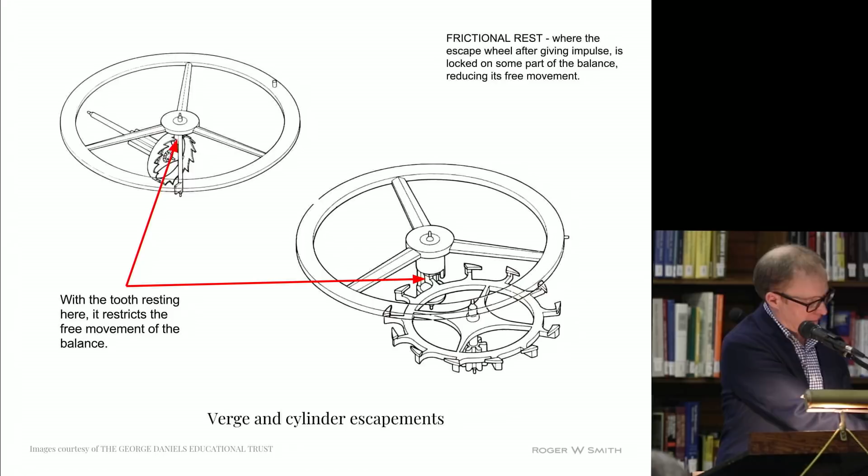Is that working? Yep, okay. Now I'll just warn you, my drawing skills are very basic. I have a 5.5-year-old daughter who is now a better drawer than I am. So if you can just bear with me.

But basically, a cylinder escapement, we have a circle. This is basically the cylinder of the staff. This is a center line, or a center point where the balance pivot will be, and this is the center of our escape wheel. And coming out, we will have a tooth which basically rests upon the wall, the outside wall of the cylinder.

So this balance wheel is turning clockwise and anti-clockwise for every vibration. And as the balance wheel turns clockwise, eventually this tooth will drop through the gap here and it'll end up inside the cylinder. So what we have is a tooth lying inside the cylinder.

And it is this issue, or this is really what frictional rest is about, because at all times the escape wheel is trying to turn in a clockwise direction, and therefore it's applying pressure onto the cylinder or the staff at these points. And it is this applied pressure here at all times which restricts the free movement of the balance. This is a real issue with the frictional rest.

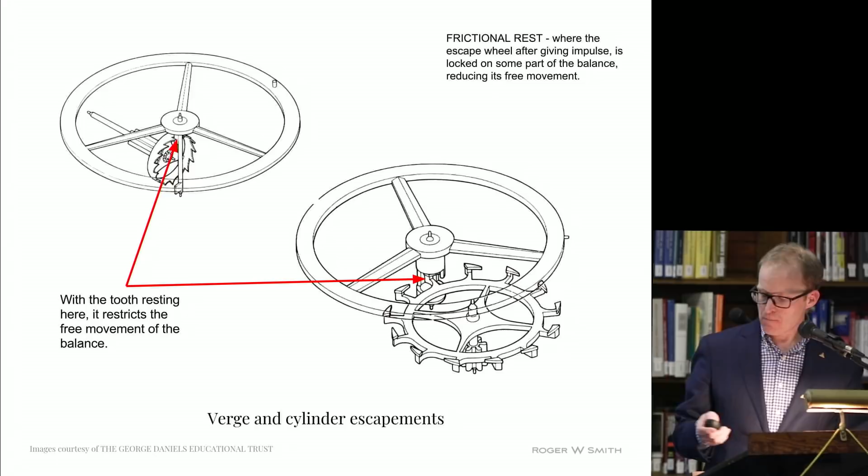So detached - what is detached? Well, a definition of a detached escapement is when the escape wheel is locked free of the balance axis by an additional component which is in contact with the balance only during the escaping angle, and sometimes for less than the whole of this angle. It goes on to say that the balance is free to vibrate in its natural period during the supplementary arc.

So I'll just do another quick sketch. A good example of a detached escapement is a detent escapement, which is this one here - highly detached, highly accurate. If we have the center of the balance wheel here, you can see over there the impulse jewel, and then coming down here we have the detent with its screw there. On the detent we have a locking jewel here, and then here we have an escape wheel center with teeth here. Now, when the escape wheel is locked, we have a tooth resting here on this locking jewel. What this means is that when this escape wheel, which is trying to turn in this direction, is locked here, when it's delivered its impulse through this jewel, this balance is now free to make its rotation. The reason is because we have clearance here and here, because of this locking. So this is a good example of a detached escapement.

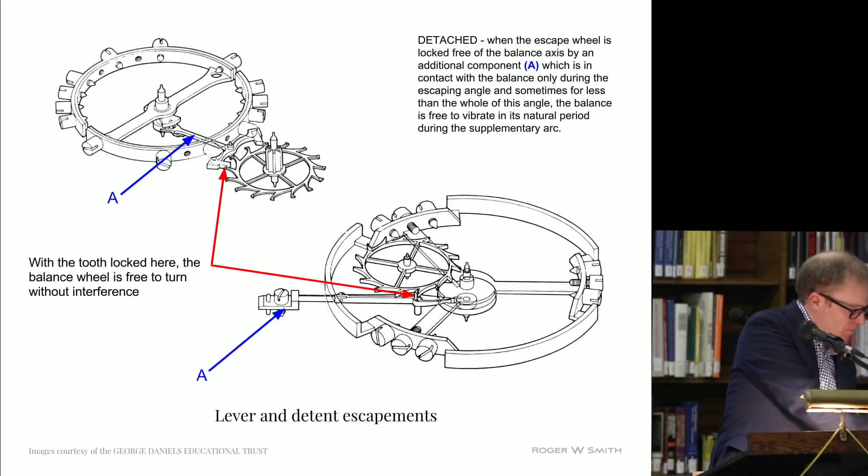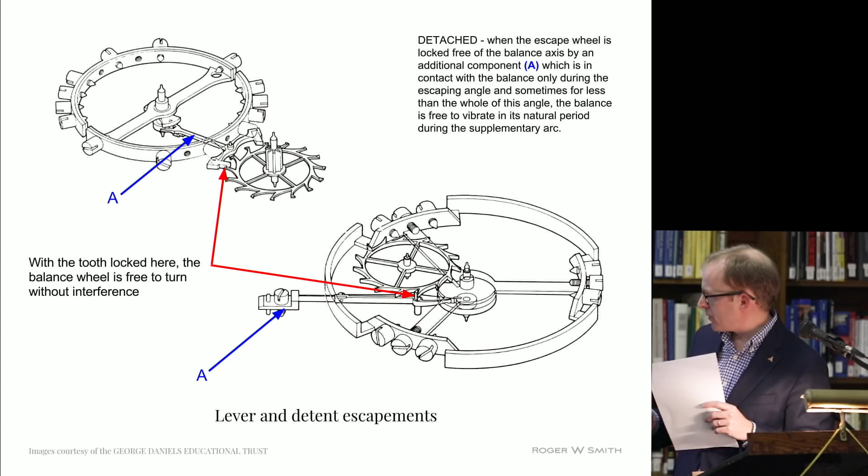So I better just clear up the areas to do with angles and so on. So with a standard arc of swing of a balance, let's say we choose a balance which is rotating with a total vibration of 270 degrees.

Basically, during the impulsing of a balance, when energy is delivered through to the balance, we have what's called an escaping angle, and that escaping angle is, in this instance, 40 degrees. We have an unlocking angle, where the escapement is unlocked to deliver the power, and that's 6 degrees. And then we have what's called a supplementary arc, so we have 112 degrees of swing after each vibration. It's this free vibration, this free swing or supplementary arc, which is key in the accuracy of a precision timekeeper. So the total arc of all this, from here round to here, is 270 degrees.

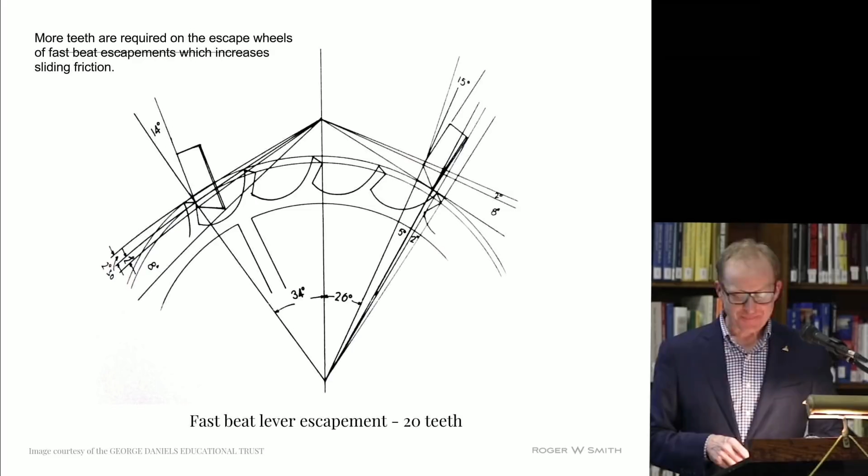So yes, that's a fast beat escape wheel, 20 teeth usually on there, but I'll tell you a little bit more about that later on as well.

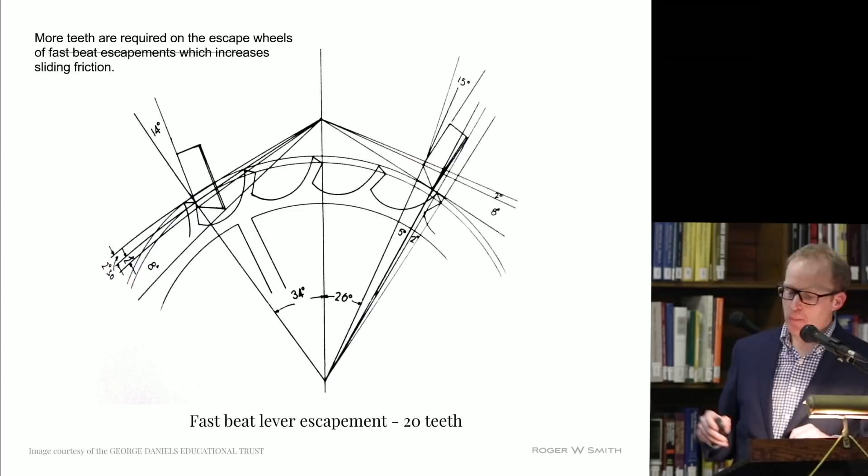So impulse. Now this was not covered in George's 1990 presentation, and over the years I've become increasingly aware of the importance of delivery of impulse. When I'm discussing impulse, what I'm really talking about is the clarity or the quality of impulse. This I'm going to cover in a couple of sections: the first is delivery of smooth power to the escapement, while a second section is delivery of smooth power through the escapement to the oscillator or balance.

If the impulse is delivered vaguely or sporadically, then you will not achieve a good rate of timekeeping. Any impulse which is hindered by an applied lubricant or transmission of power will be open to vagaries in its ability to deliver good, clean and consistent impulse. So let's first discuss the poor transmission of power to the escapement.

So Breguet's natural escapement is a very good example of a poor transmitter of power through to the escapement. Why? Well, it's because of these two gears here, which are linked together at a close ratio of obviously 1 to 1, and due to their large diameters, which at their rolling point of contact can act as large disc brakes on the power delivery. Because of that large diameter of these two closely mating gears, you can only ever achieve a theoretical rolling action between both sets of teeth.

Why is this? Well, it is because for the wheels to rotate, they need freedom within their pivot holes. And it is this freedom which will allow the wheels to move past their theoretical rolling point, which will create interference and, in turn, fluctuating power delivery.

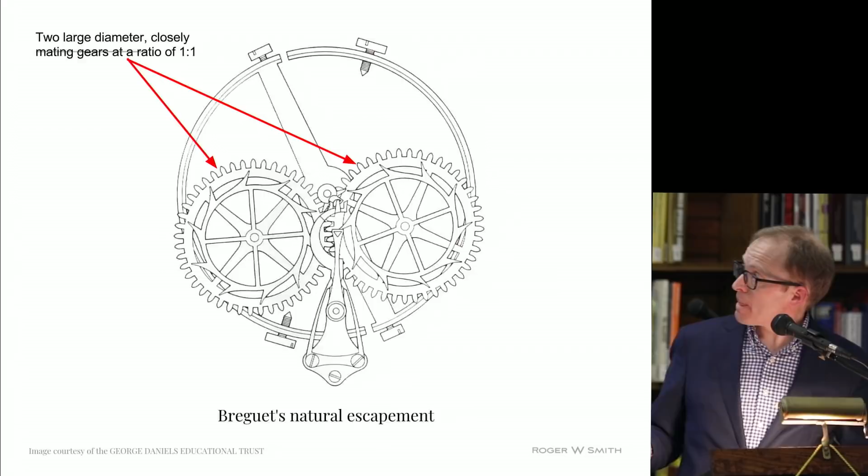Another issue to consider when using large diameter and close ratio gears is tooth surface contamination. Here is an example of where I've seen this occur on the slimline coaxial escapement, where these two sets of teeth mesh together.

I began working on this escapement in 1998, and it became apparent fairly early on that these closely ratioed gears could cause issues, particularly if the surfaces were not scrupulously clean, but also if the surfaces were too clean.

I also experienced tooth surface breakdown, which I put down to the fact that the true rolling action could never be achieved. What I witnessed was a deposit build-up where the two gear ratios vied for settlement and created interference, resulting in a deposit build-up which caused the gears to stagger, or on some occasions to lock.

So how do we reduce the risk of this interference? Well, in gearing, which requires freedoms for smooth running, we can never completely remove this error, but as a watchmaker, it is my duty to minimise the error.

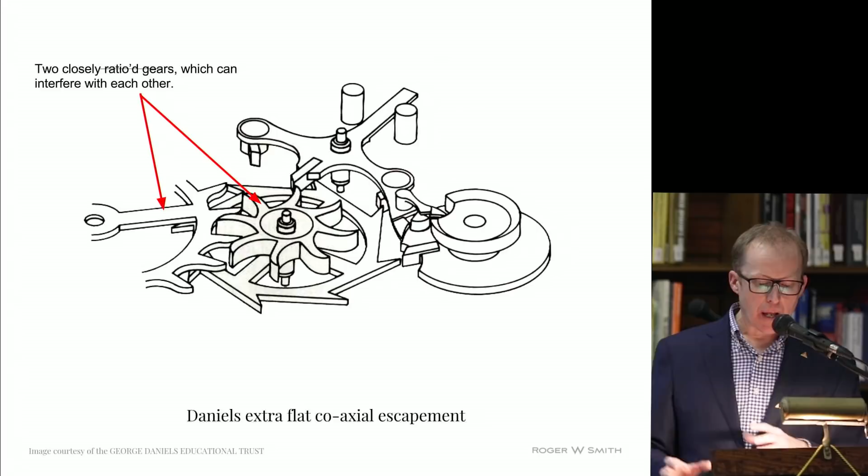By using a traditional large gear driving a very small pinion, the effect of this varying depth of engagement between the two mating gears will be greatly reduced. This is because of the increased dominance of the larger driver over that of the smaller pinion.

So two ratio gears, 1 to 1. Basically, two similar diameter wheels, and basically you have two lever actions which basically equal each other out.

Because these wheels are a large diameter and lower down in the train where the power is starved, because of these large diameters, suddenly this issue of smooth transmission becomes more and more apparent.

So the way around it is simply to use a traditional setup where you have a large driver turning a very small pinion. It's a simple sort of lever action. Basically, we have the dominant gear that masks all the inefficiencies and weaknesses of the smaller gear. And that's really the way to create a nice, smooth running train of wheels.

So in conclusion, if you are looking for a smooth transfer of power through to the escapement, then I would advocate not using close ratio gears in any part of the going train of a watch. Instead, use only traditional ratios, such as 7 to 1 and upwards.

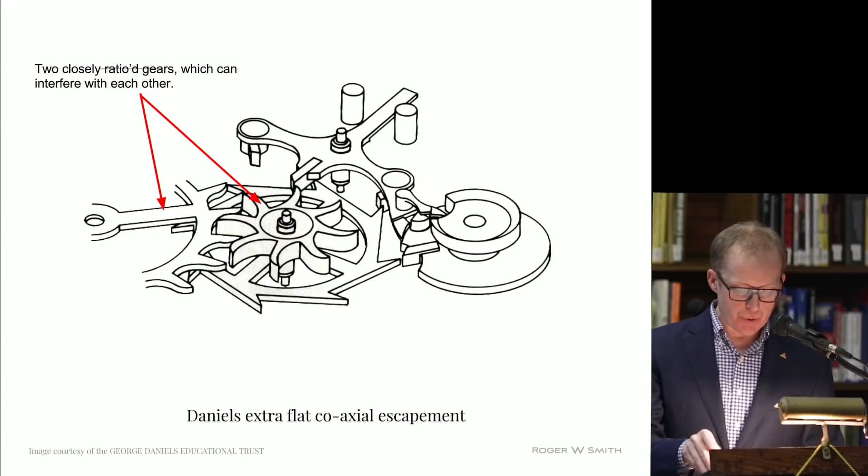How do I start this, Nick? Just click again. Oh, sorry, Nick. Yes, sorry. Sorry. Thank you. Thank you.

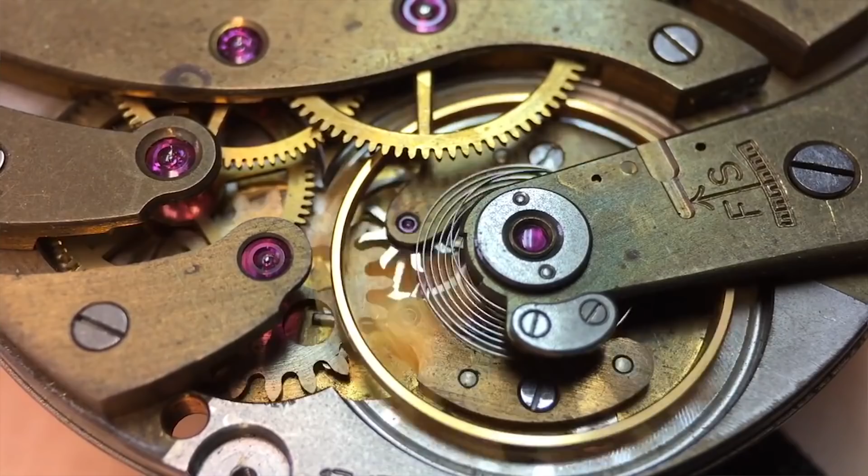So just before I move on, here is a video of the extra flat coaxial escapement in action. This was made and fitted into a caliber 17170 movement by Patek Philippe in 1980. And you can see this very close ratio setup. It's actually a 2.5 to 1 ratio here.

And you can see how possibly this is susceptible to stoppage and issues with the surface of the mating gears becoming contaminated, and it's not a good idea, basically. Especially lower down in the train, when you're getting close to the escapement and the balance, when the power delivery is so critical, this sort of close ratio gears is in my mind a bit of a no-no.

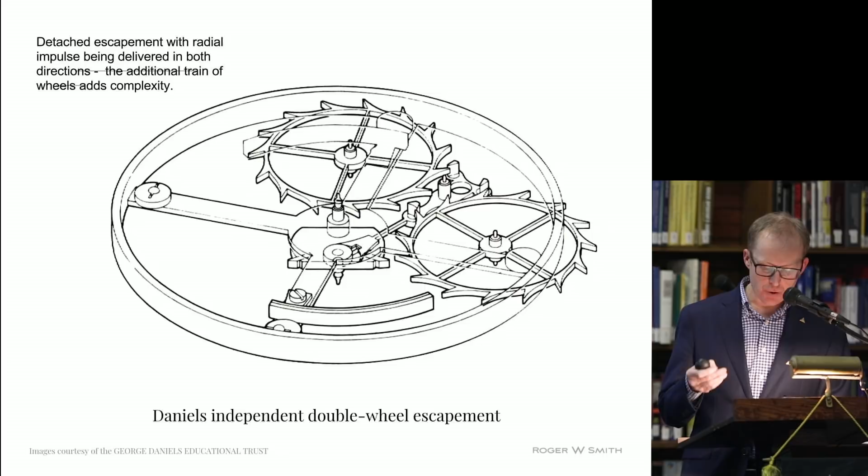It's a fascinating escapement which heralded a major breakthrough for George Daniels in his quest to design an escapement which delivered impulse through a simple pushing action in both directions, and therefore remained unaffected by the deterioration of an applied lubricant. An excellent escapement, but its Achilles heel is that it requires an additional train of wheels and mainspring to drive the second escape wheel, and it is this overcomplication that has the potential to fail.

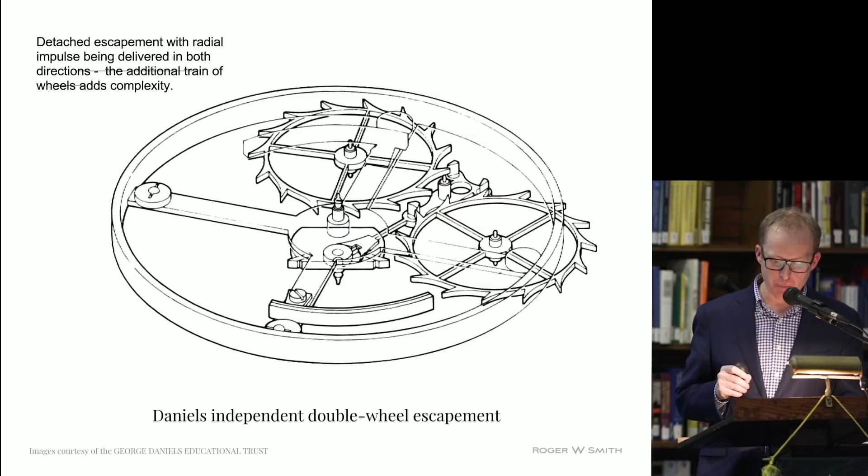So it's this extra escape wheel. Brilliant escapement, and he achieved what he wanted. He achieved radial impulse in both directions, which was key.

Now, I'll just take this opportunity to say that in researching this presentation, I noticed that Wikipedia pages summarise the coaxial as follows. I have to go to Wikipedia to find out about it, you see. And I quote, it says, although a highly ingenious escapement design, the Daniels coaxial nevertheless still needs lubrication to the lever pallet pivots. I must say this is a completely false statement. No oil is required on these pivots at all.

It goes on to say, in addition, because of its geometry, the impulse wheel can only have a limited number of teeth.

Thus it is necessary to have an extra wheel and pinion in the wheel train, the pivots of which will also need lubricating. Now, I would agree with the sentiment of this, but certainly in my experience, we do not need an extra train of wheels, and so we have avoided this completely.

So we did a lot of work. I was determined when I set about designing the Series 2 that I was not going to have that extra set of wheels, and Andy Jones, one of my colleagues, who's a far better mathematician than I ever will be, came up with some very clever ratios to get around this issue. But what we did achieve is a very smooth running, high ratio gear train, with a straightforward barrel, centre, third, fourth, and escape wheel, driving an 8-tooth escape wheel.

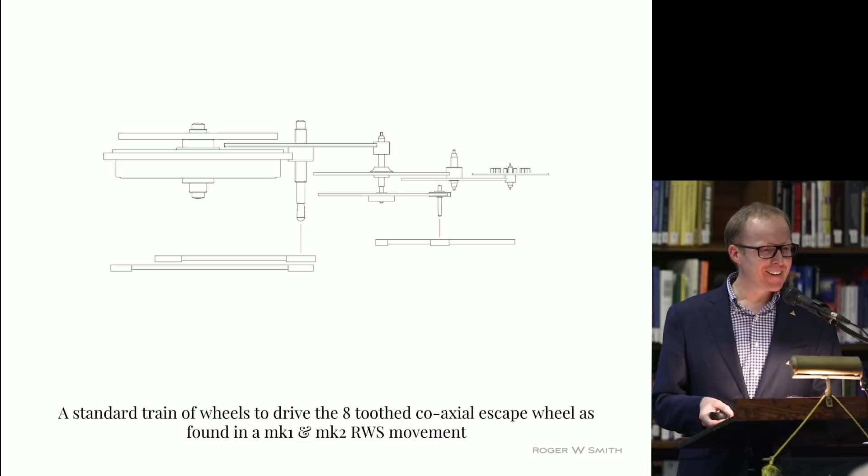So it is possible. Now, if anybody agrees with what I'm saying, and anybody who knows how to get into Wikipedia and correct this error, I'll be delighted if somebody could do it on my behalf.

Thank you. So I've now concluded my section on smooth impulse being delivered to the escapement. Now we can look at how the escapement delivers smooth and constant impulse through to the oscillator being the balance wheel. So here we have the lever escapement and the Daniels coaxial escapement.

I touched on this earlier when I discussed the verge and the cylinder escapements. You may remember that the cylinder is impulsed via a sliding action, sliding delivery of power, whereas the verge delivers its power through a pushing action. These early forms of transmitting power continue to this day in the form of the lever and the coaxial escapement.

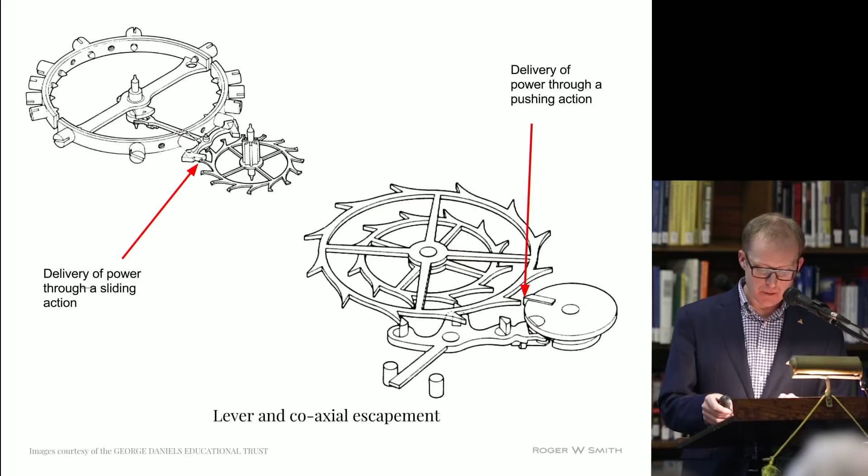Here we have two sketches demonstrating the fundamental difference in power delivery between the lever and the coaxial escapement. On the lever escapement, we basically have this tooth, which initially is locked here on this section in red. Then as the escape wheel is released, as the lever moves, this tooth slides down this long incline face, imparting this sliding action, delivering its power through this sliding action here.

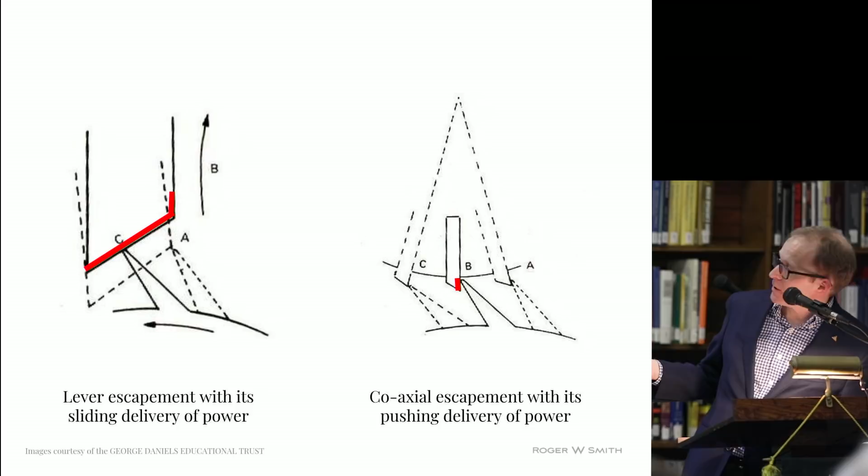In the coaxial escapement, we have the tooth hitting the jewel here, and as it delivers its power from here through to here, through this straightforward pushing action, there is sliding action, but it's only this much sliding action, so it's minimal. And the fact that it's a pushing action, it doesn't really have an effect and doesn't really need lubrication.

So one way I always use to describe the difference between how power is delivered between a coaxial and a lever, I will show you now.

So when you all go home tonight, please practice this. What I want you to do is to stand in front of the door with your hand like this. First of all, stand with your hand just above the handle. Then basically just walk forward, and your hand will just slide down this portion of the door. And then you're through it. You've delivered your energy and got through the door to the other side.

Now, for any impulse delivered through a sliding action, it will require lubrication in order for it to function. For an impulse delivered in a pushing action, this is not the case. And although I do use lubrication in my coaxial escapements, the lubrication is not there in order for the escapement to function.

This is nothing new. If we look at the verge escapement and the cylinder escapement that we looked at earlier, the verge with its pushing impulse will always work without lubrication. And in servicing, you would never add oil to a verge watch. Whereas a cylinder and its sliding impulse delivery requires oil for it to function - it will not function without oil. And that's the same for the lever.

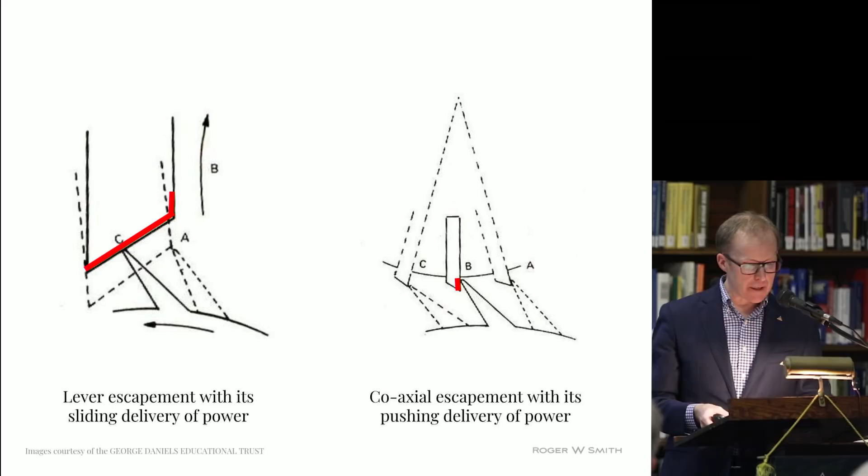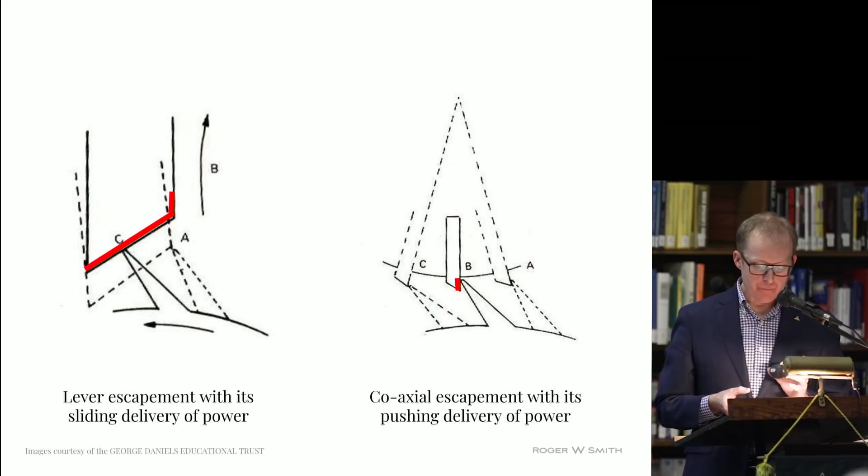As Breguet once said, "Give me a perfect oil and I will give you the perfect watch." He was partially correct, but I feel he should really have said there are no perfect oils for a watch, and therefore the watch must be redesigned. George Daniels realised this and designed a new and radical escapement by introducing pushing impulse in both vibrations, where its performance would not be affected by the application of a lubricant, which in turn advanced the life of the mechanical timekeeper.

We have seen the difference between how sliding and pushing impulse occurs, but how does this play out in practice? Well, I hope this diagram helps to explain. So the green here represents the angle in which the escape wheel is delivering its power through to the balance.

So for a 4.5mm diameter escape wheel, the lever escapement spends 210 degrees of its rotation involved in the delivery of its power. For a 4.5mm diameter escape wheel of the coaxial, it spends an extra 45 degrees imparting its energy, which means that 255 degrees of its rotation is involved in the delivery of power through to the balance. And this is good. This is really good. This is a gain.

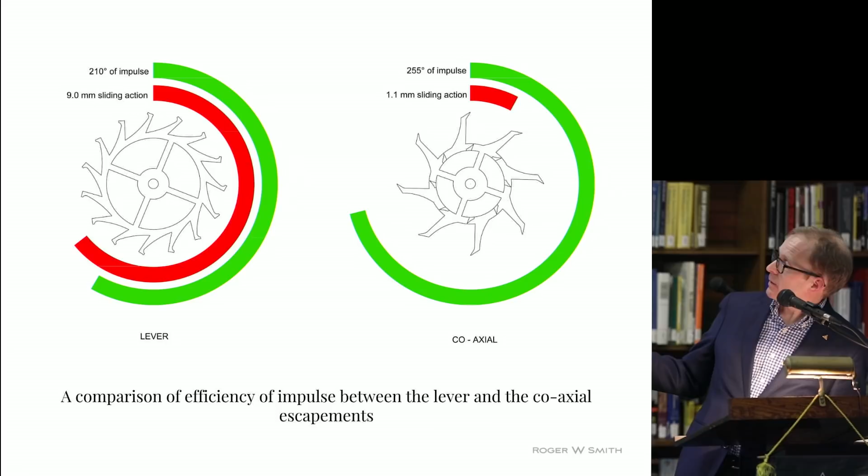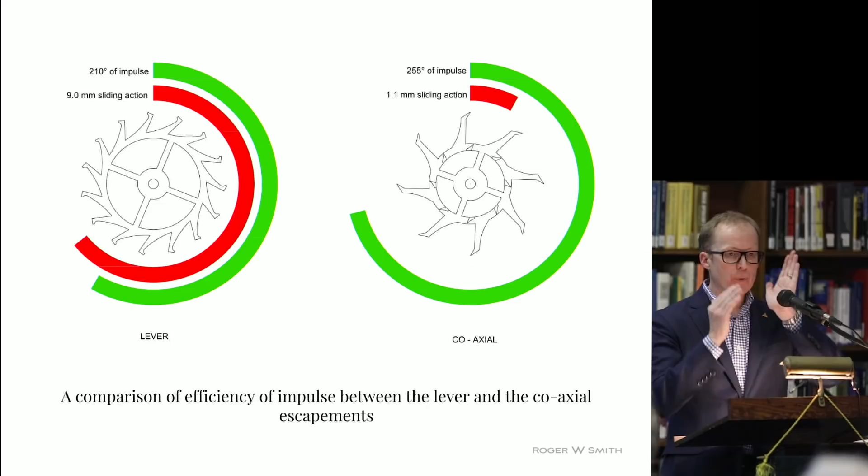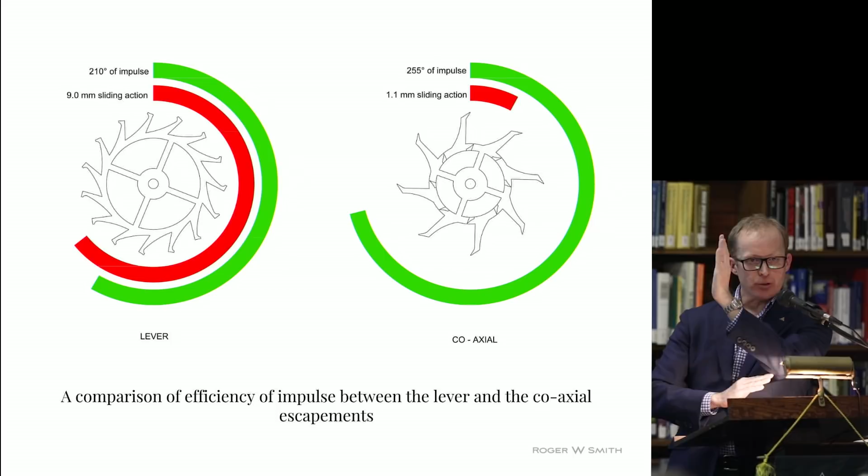And what I found really fascinating when I was working on this and calculated it, is that one revolution of a lever escape wheel delivers 9mm of sliding action. And if you remember the lever jewel we saw before, a tooth basically hits the jewel, slides down that jewel, and then down its inclined face. So it's basically multiplying this distance travelled by the 15 teeth that we have on the escape wheel of a lever escapement.

The reason for the red arc being longer than the green arc is because of this long sliding action down these two straight faces.

Of note is that should you add more teeth onto the escape wheel in order to create a fast beat watch, then you are further compromising the watch by increasing the amount of sliding action, and the movement's power requirements will have to be increased to compensate. So adding more teeth onto the escape wheel, in my view, is completely false logic.

Now, if we look at the coaxial escapement, what is quite incredible is that even though there is a gained increase of power delivery, the amount of sliding action is only 1.1mm for one revolution of the escape wheel, and the rest of the impulse is delivered frictionless. It's just a simple frictionless pushing action.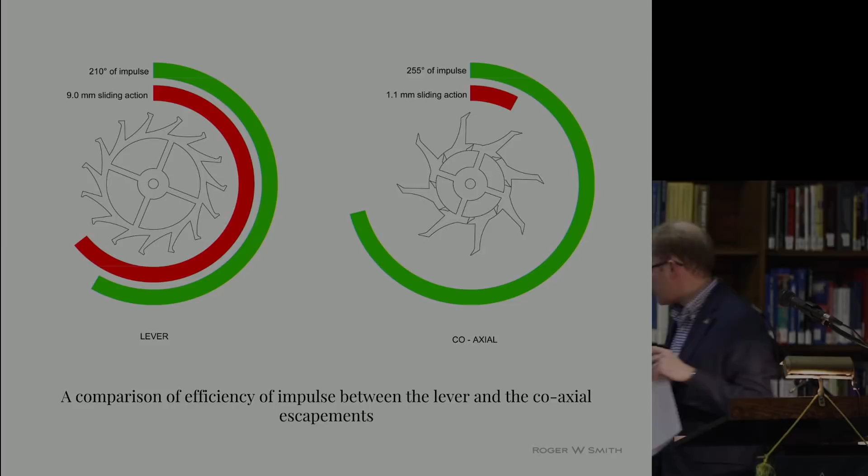So for a lever, if we take that 9mm and divide it by the 210 degrees, we get 0.04. If we take the coaxial, we take the 1.1mm and divide that by the 255, we get 0.004. So if we take the 0.004 and divide that, we get 10. And that 10, for me as a watchmaker, is very exciting, because that basically indicates the efficiency of the coaxial over the lever escapement. It's 10 times more efficient.

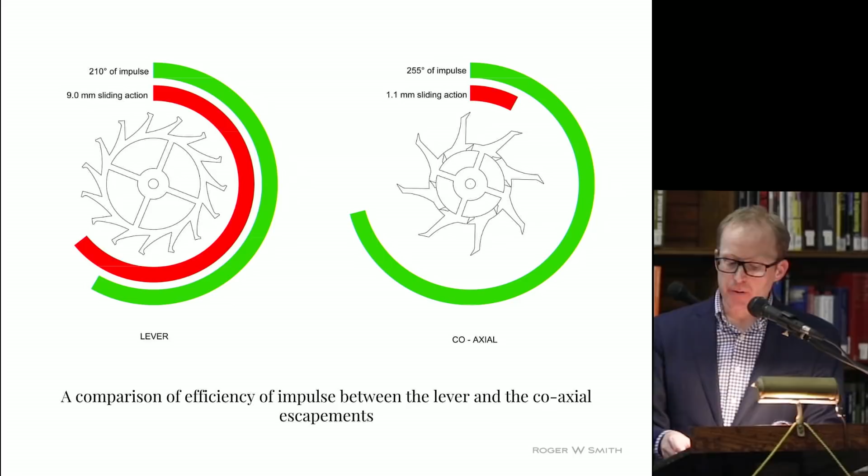And this is brilliant. This is impressive stuff. So for a watchmaker, this is wonderful news, because these energy savings are something that the watchmaker can use in order to further enhance the life of the mechanical timekeeper.

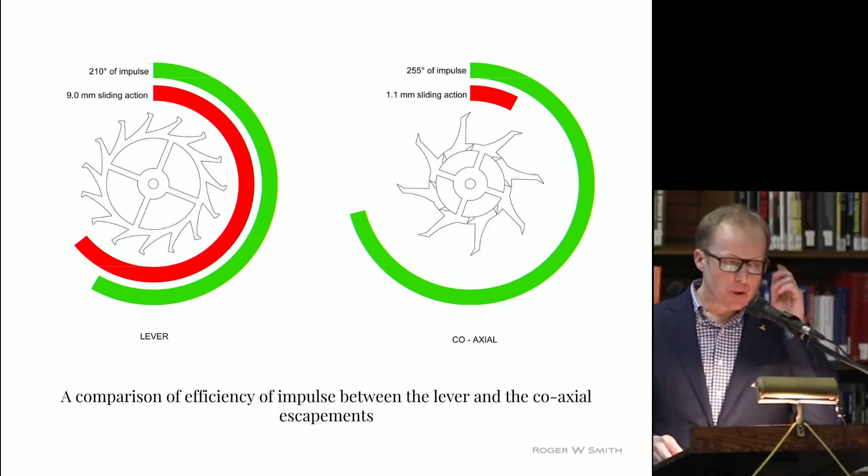So what are the benefits to this energy saving? Well, it means that the vibrations per hour can be dropped down to 21,600, or my preference of 18,000 vibrations per hour, because this escapement is no longer reliant upon the use of a lubricant, and therefore does not have to hide the inefficiencies of the escapement and failure of the oil behind the high beat mechanism.

We can go further and reduce the mainspring strength required to drive the watch. This reduced power will reduce the effort it takes in winding the watch, and also the effort the mechanism has to endure in restraining all this power and releasing it through its train of wheels, etc. The real gain here is that the watchmaker can then extend the service intervals of their watches and reduce the running costs to the owner.

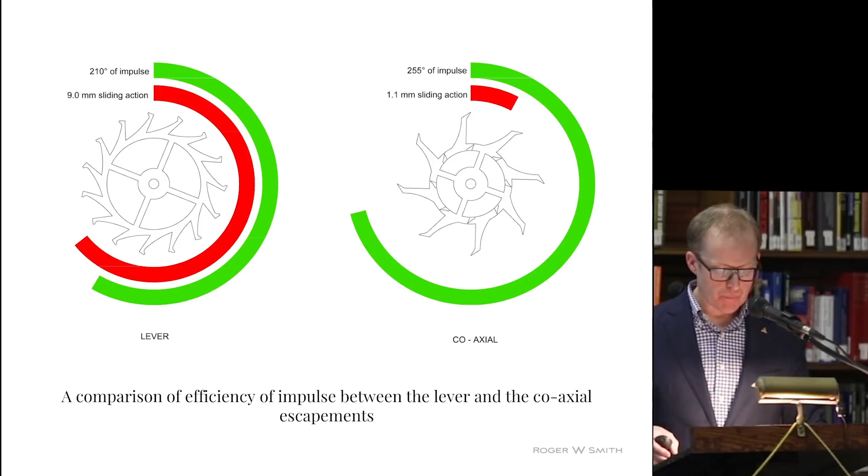And so now, armed with the information and settled in the knowledge that the coaxial is a world-beating escapement, I began to look at how we can further improve its performance.

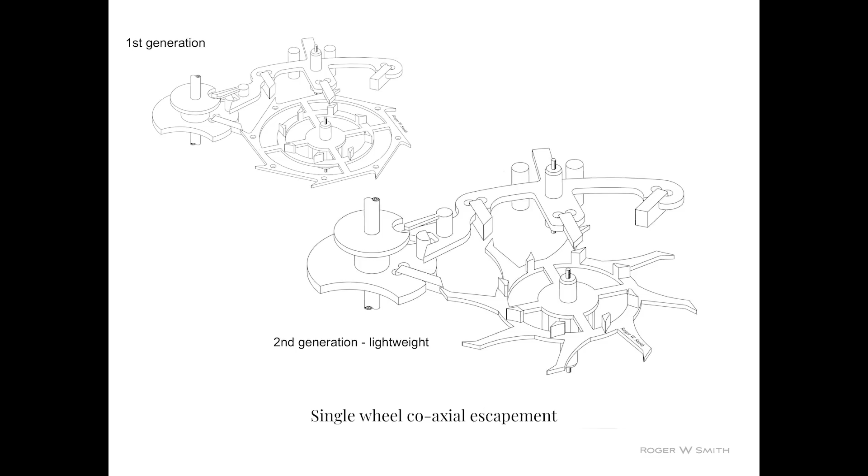So these are two of my single-wheel variants. The upper one there was the very first, which I came up with the idea for in 2010, and over the years it has now migrated into this more lightweight variation.

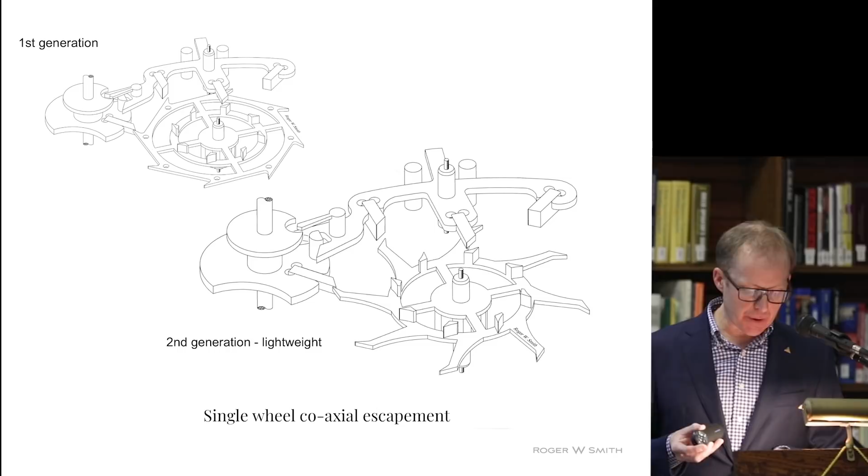In 2004 I began development work for my Series 2 wristwatch, and this was a big step for me because I wanted to use a coaxial. Although I had learnt a great deal whilst working with George on his Millennium series of watches, which housed the coaxial escapement, I was still unaware as to how to design and fit the escapement into a movement. As you can imagine, the design phase was a very steep learning curve, but the result was the very first production watch in the world to have been designed to house this new escapement technology.

Initially I used to make the coaxial wheels in the same process that George did. So basically a small pinion, and then we would mount onto this arbor the lower locking and impulse wheel, and then above that we would mount the second wheel.

This worked well for a period of time, but it was very, very difficult. Although the watches worked extremely well and we got a high degree of accuracy, the issues I encountered were the fact that it's virtually impossible to guarantee that the concentricity of these two sets of teeth, of the two wheels, could be 100% concentric to each other.

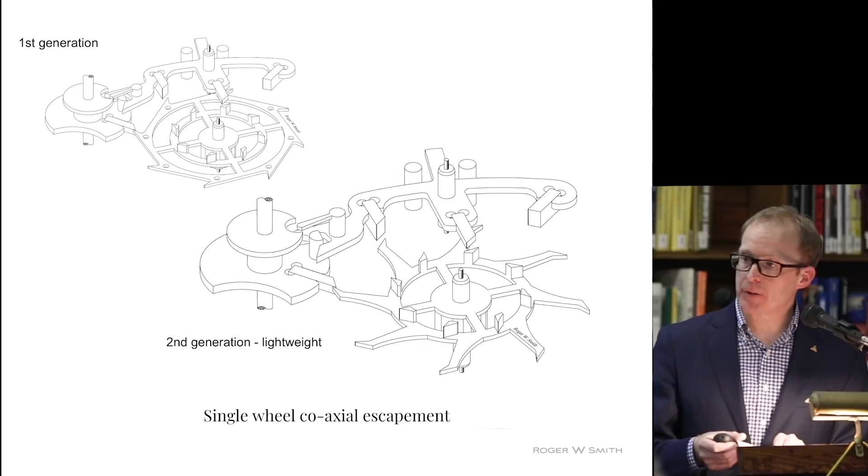Interested by this link between weight and performance, I decided to look at reducing the scale of the escapement in the hope of finding more gains. Enthused with the new work holding techniques developed for the lightweight wheel, I realised this could happen. A remanufacture of an existing dummy Series 2 movement took place, and the new smaller escapement was fitted. This time the savings in energy were off the scale, and a considerably weaker mainspring was sought to keep the escapement from knocking the banking.

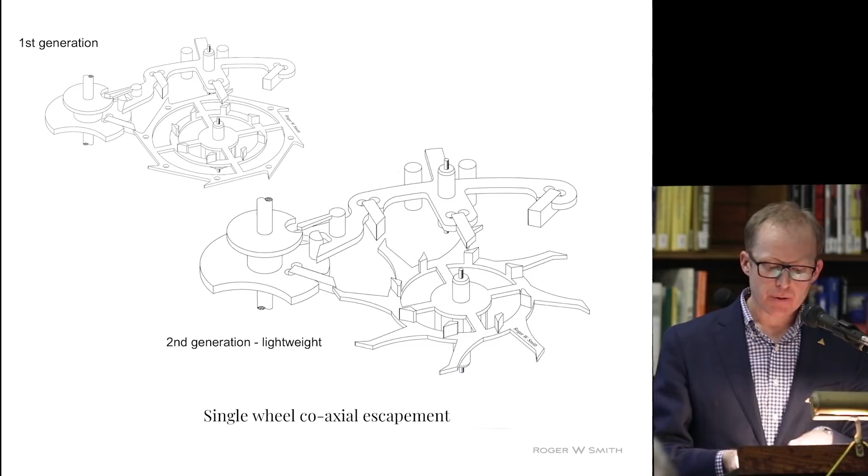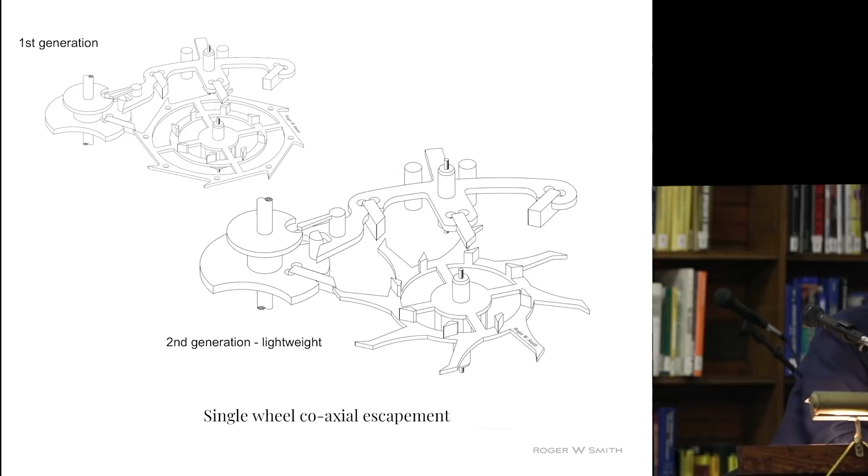And here is a video of that movement. With this piece, the escape wheel has been reduced from a diameter of 6mm down to 4.5mm. I'm afraid the clarity of the escape wheel there is not too good, I apologise for that, but this has been really engaging work, and I now feel that we've entered into a new era of the development of the coaxial escapement.

Due to the super efficiency of this escapement, I am beginning to understand that designing of new escapements should not all be about the escapement, but instead we should be considering the long-term effect on the running of the mechanism and savings in energy. This is really where the focus of watchmaking, in my view, should be.

So armed with this experience, which has been steadily gained over the past 20 years, I set about redesigning my Series 2 mechanism to house this new and more efficient single-wheel coaxial escapement.

This journey also caused me to rethink my production, and I've now created a small range of 4 pieces based on what I'm now calling my Mark II movement.

The mechanism contains many technical changes which have all been a direct result of the continual refinement of the coaxial escapement and my knowledge.

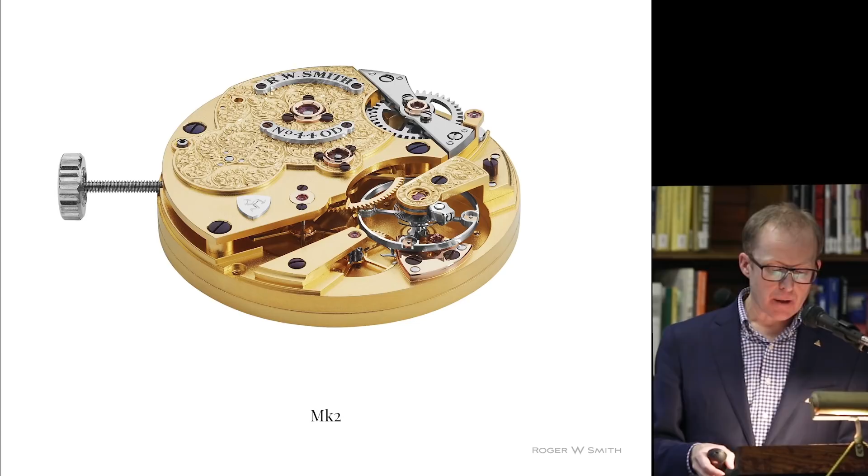And of course, highly detached balance. We need impulse delivered through to the balance in both the clockwise and anti-clockwise directions. And last but not least, the power must be delivered to the balance through a simple pushing action, so as to minimise the effects on oil through climatic conditions and, of course, its own degeneration.

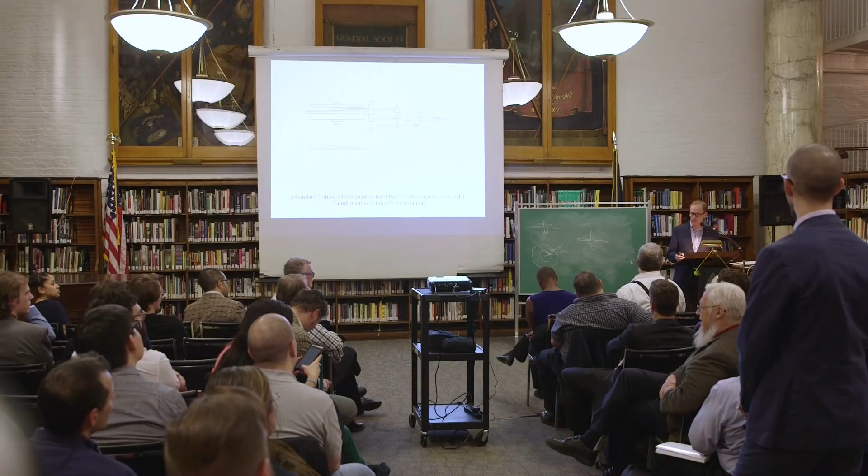All I know is that what we're doing is gradually improving and lightening everything. And I know I can base that on the mainspring strength which we now use in the watch. It's a substantial watch, and yet we have a relatively light mainspring in there. So I suppose to answer your question, in theory, the balance spring will also be equally light as well.

I just want to say it was a wonderful presentation, and I have maybe about 3 questions. How do you feel about angling the escapement - anything in reference to that about accuracy? I'm sure you're familiar with a couple of watch houses doing that. What did you think about that?

Angling what? Sorry. Just angling the escapement or the tourbillon, how do you feel about that? I mean, I didn't really see it in the... Correct, yeah, like the Greubel Forsey. Yeah, well, it's a very logical thing to do, actually.

Because with the best will in the world, to get a watch to keep time in the flat, where its pivot is just down, when it's on edge it'll keep very different time because of the extra friction and so on. So angling it at 30 degrees is a good idea, but it takes up space - that's the issue.

Now, what George did, which was interesting - can everyone hear me? Yes. So he had an end stone.